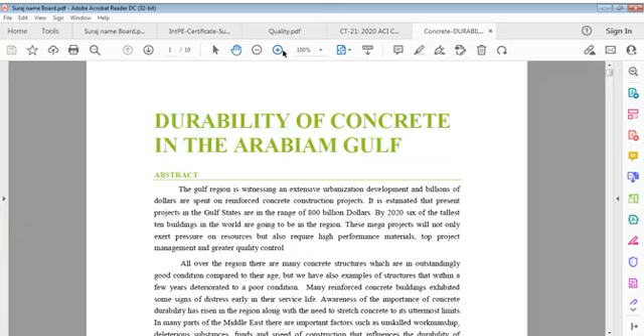It is concrete terminology. We have another file we will like to discuss, which we continued yesterday, and that is about the durability of concrete, which is just a file from some source. I cannot say that's the only file, but it is a reference file. There are so many files in the future also. I like to get these files through whatever way, myself writing, or getting reference from the internet, and it's really very important. So we have here these files. We can refer to this from time to time.

Now I start with my file that is meant for you, and that is the quality file. You can consider the name of the file is quality itself. I have written here, you can see on this screen, quality PDF. The title is in explanatory mode, a long title, and it is Active Quality Performing Application plus SHE, where S stands for safety, H stands for health, E stands for environment, plus engineering approach on designs, manufacturing as well as construction.

A kind of redefinition, though it's not in fact an original redefinition, but a referral. Meaning, what did we understand before, what do we understand now, and what should we understand in future for working considerations. It's not something new I am going to discuss with you, but I am going to share with you my views. Maybe my views are not good for you, you may know much better than what I know. That is interesting. If you know much better, I like to learn from you, through your comments, your criticism or your support, whatever it could be. Everybody has a chance.

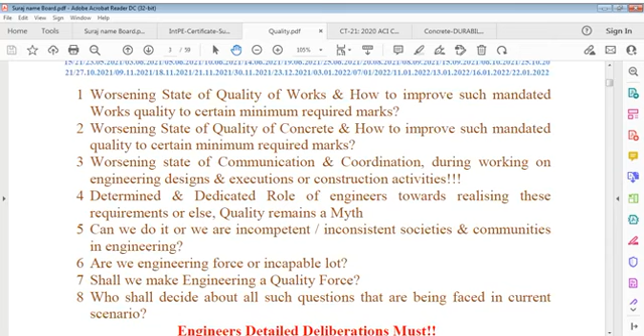And that's where the point lies in. That point is very important, we have to understand that fact. Certain red lines that must be turned green, and what to do about that? That is the point. You can see this file has been very old now, so many dates are indicated on its header, and that's all amendments made from one point to other point.

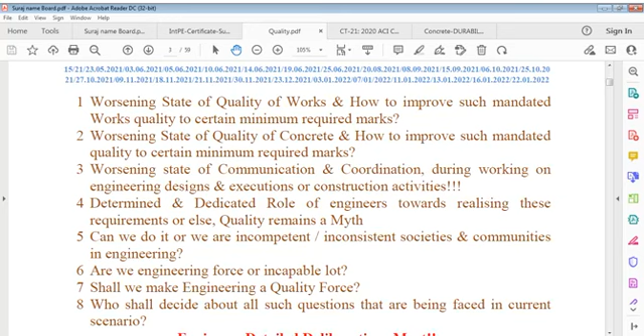Why say worsening state of quality of works? That is, you can say, the boosting title for this talk. Worsening state of quality of works, and how to improve such mandated works quality to certain minimum required marks.

I think the battery is fully charged and I can update on this. I put it off for some time, my battery to be put off for some time, and then less than half an hour after that I restart it. Okay, yes, please.

Alright, worsening state of quality of works. What to say about that? Worsening state of quality of works and how to improve such mandated work quality to certain minimum required marks.

That is first requirement, of course it is. Then you can say another one: worsening state of quality of concrete. First was the quality of works, and then the same question lies in and is repeated as worsening state of quality of concrete, and how to improve such mandated quality to certain minimum required marks.

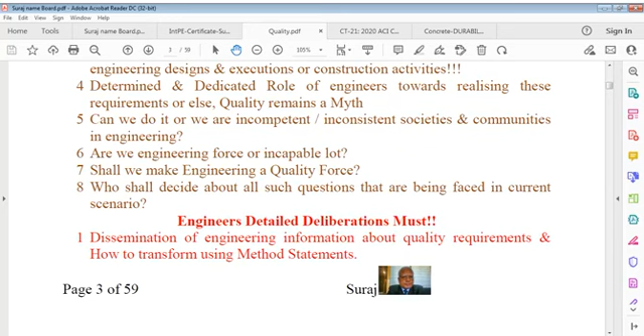The dissemination of engineering information about quality requirements and how to transform it using method statements. And the general description here is about requirements of the method statement. As I said in the first point here, methods. Then the question is methods, or rather I should say, the explanation is this way.

Explanation is the methods can be designed and drawn. Methods can be designed, or you can say action of line can be defined on methods. Or you can draw it in writing or in sketch way. It's called drawing of method statements or statement writing, or you can use your way, but I can call it

methods can be designed and drawn or stated for designs, for execution, for carrying out activities, as well as for rectifications, remedial, and for services. That is how methods can be designed, drawn, stated, for design work, for execution work, for carrying out activities, as well as for remedial actions or rectifications, for services.

There is one important point. The methods term used means comprehensive methods and not selective ones. We cannot simply take out something and say, given here, I am going to do this. You cannot have an excuse on this requirement because it is also a totality. Totality is required, not selective. We cannot select something and say this is right, therefore the previous one and next one shall be right. We cannot claim by selective action; this is chain activity.

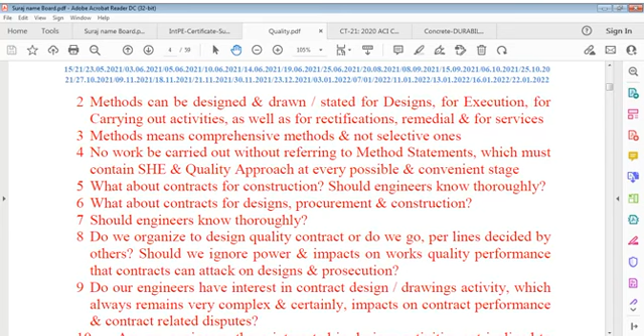Now we are going to jump on other points of view. I'd like to jump onto these terms later. Now we have to go to durability of concrete in the Arabian Gulf, though the spelling is wrong, don't worry. I have taken this file from the internet, so I could not correct it. Next time we'll look into this. If I write wrong, no problem.

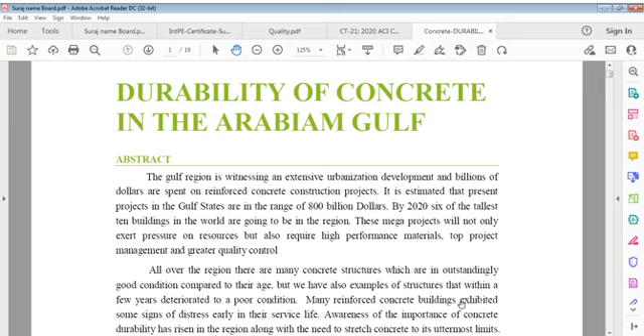That's not the point here. We discussed yesterday the abstract; it was just for introduction purposes, that it's for the Gulf. I discussed it at length. But just for information, I repeat this abstract so that you know what we are going to think of, and the remaining part we did last time, the long one. This is about the Gulf, that is GCC, the Gulf Cooperation Council, and it says the Gulf region is witnessing extensive urbanization. It's been long back and it's still happening now.

Development and billions of dollars are spent on reinforced concrete construction projects, RCC projects. It is estimated that present projects in Gulf states are in the range of $800 billion. This is just a reference, and 2020 has already gone. By 2020, 6 of the tallest 10 buildings in the world were to be part of this region. These projects not only exert pressure on resources but also require high performance material, top project management, and greater quality controls. These are all requirements.

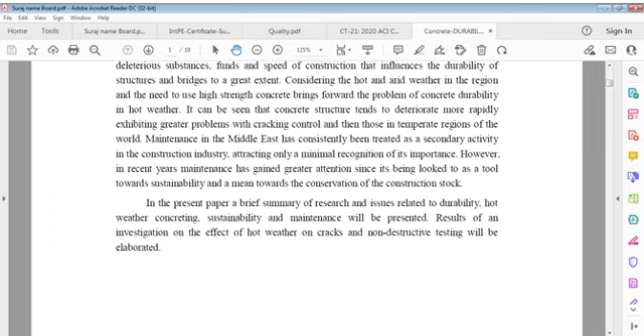Maintenance in the Middle East has consistently been treated as a secondary activity in the construction industry, attracting only minimum recognition of its importance. In recent years, maintenance has gained greater attention since it's being looked to as a tool towards sustainability and a means towards conservation of construction stock. Now it's a paper only. This paper gives a brief summary of research and issues related to durability, hot weather concreting, sustainability and maintenance, presents results of an investigation on the effect of hot weather on cracks, and elaborates on non-destructive testing.

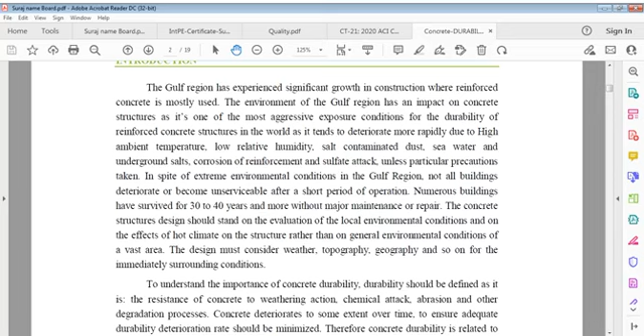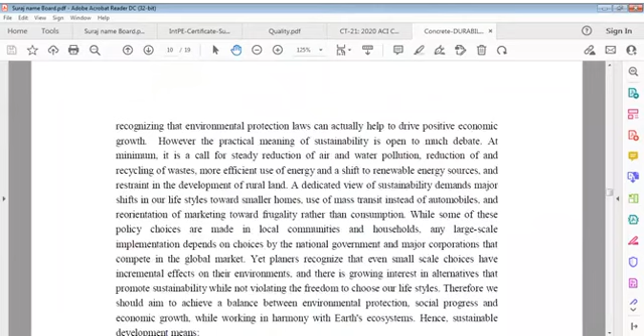We have gone through these pages. I will go back to some. Sulfate attack, carbonation, chloride corrosion we had done. Environmental cracks, I think in 29 there was something here. Let's start from here. The UAE is getting stricter on the environment friendly side to development, more so because of the rapid scale of development in so short a time, just 30 plus years.

Development has sometimes been at the cost of the environment, which is every country's, every region's natural heritage. Environment is not our build-up, just like air is not our build-up. Air, water, all these are not our build-up. We have to depend on nature to get more and more. That's what is important for discussion: development which sometimes has been at the cost of the environment, which is every country's, every region's natural heritage. That's what it says.

A fast growing population in that area, immense financial resources, and an ambitious development program have all combined to place strong pressure on the environment in this area, the UAE. The combination of all these factors is very important, that is, to enforce protection of the existing environment and to control how it can be done. That's an important point.

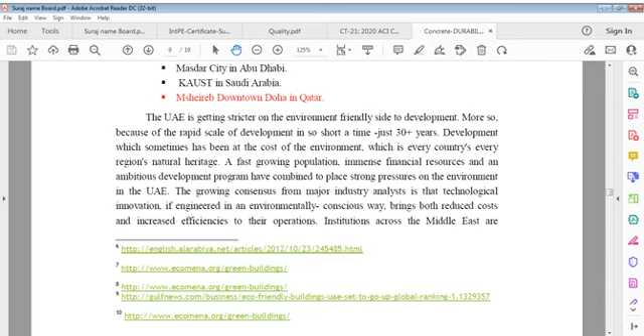The growing consensus from major industry analysts is that technological innovation, if engineered in an environmentally conscious way, brings both reduced cost and increased efficiencies into their operations. Institutions across the Middle East recognize that environmental protection laws can actually help drive positive economic growth. However, the practical meaning of sustainability is open to much debate.

At minimum, it is a call for steady reduction of air and water pollution. Important is steady reduction of air and water pollution, reduction of and recycling of wastes, more efficient use of energy, and a shift to renewable energy sources, restraint in development of rural land. So many reasons are here, which is a minimum one, and nothing very specific. And that's a call for study.

That is how to study the reduction of air and water pollution, how to reduce air pollution and how to reduce water pollution, and of course reduction of and recycling of waste, more efficient use of energy and shift to renewable energy sources, restraint in development of rural land, a dedicated view of sustainability,

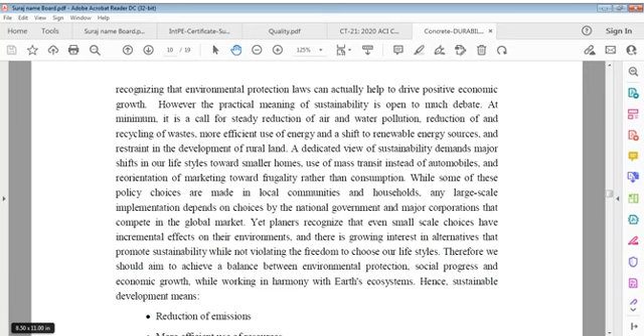So a dedicated view of sustainability demands major shift in our lifestyles towards smaller homes, use of mass transit instead of automobiles, and reorientation of marketing towards frugality, economical use of money, economical use of material, economical use of every requirement rather than consumption. While some of these policy choices are made in local communities and households, large-scale implementation depends on choices by policymakers or by national governments or state governments and major corporations that compete in global market.

Even then, planners recognize that even small-scale choices have incremental effects on their environments, and there is growing interest in alternatives that promote sustainability while not violating freedom to choose our lifestyle. Therefore, we should aim to achieve a balance between environmental protection, social progress, and economic growth. We have to have an objective to achieve a balance or state of equilibrium among environmental protection, social progress, and economic growth while working in harmony with Earth's ecosystem.

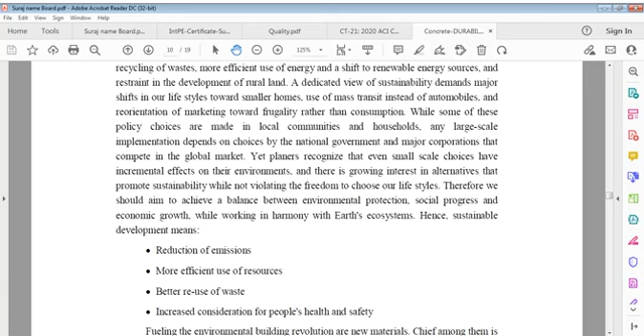Hence, sustainable development means reduction of emissions, more efficient use of resources, better reuse of waste, increased consideration for people's health and safety. These are very normal. Emissions control and resources best use, waste recycling, and of course health, safety, and I can add on top of all these quality issue.

Fueling the environmental building revolution are new materials. Environmental building, or we call buildings fit for natural use, not artificial orientation. And chief among them is glass, stronger, safer, and more energy efficient than ever. Low-emissive glass lets visible light in. You can take sunlight through glass. So low-emissive glass lets visible light in but keeps heat out.

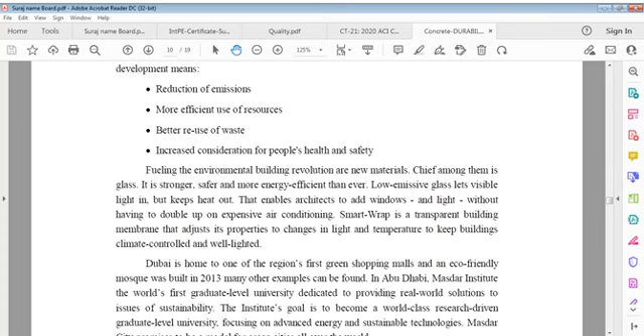That enables architects to add windows and light without having to double up on expensive air conditioning. Smart wrap is a transparent building membrane that adjusts its properties to changes in light and temperature to keep buildings climate controlled and well lighted.

This is a statement made by these people, and you can see yourself also what it says. Very simple. Fueling environmental building revolution means you have to propel environmental orientation for new buildings, and you have to use new materials, and a considerable part in that is glass, which is stronger, safer, more energy efficient than ever before.

And it should be low emissive glass, which lets visible light in, allows light to come into your covered area, and keeps heat out because of the tint on glass. It's not 100% allowing sunlight to go in, but light goes in without temperature. Temperature remains outside, probably around 70% of it remains outside. And this enables designers to add windows and light without having to double up on expensive air conditioning.

Percentage is how much in this thing? So I have to go back and see.

Well, no problem. So it enables our designers to add windows and lights without having to double up on expensive air conditioning. And Smart Wrap is a transparent building membrane that adjusts its properties to changes in light and temperature to keep buildings climate controlled, well lit. You can say well lit rather than lighted.

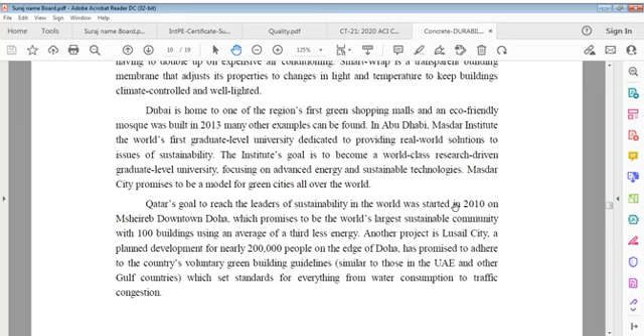If green building technologies were used in the Middle East instead of usual technologies, environmental problems will be tackled. Just a minute, please.

If green building technologies were used in the Middle East instead of usual technologies, environmental problems will be tackled significantly in addition to long-term financial returns. In terms of overall sustainability, the MENA region is still late compared to other markets, but in the next couple of years certain percentages of companies in this region have over 2 million square feet of green projects. All right, anyway, the construction durability issue is continuing.

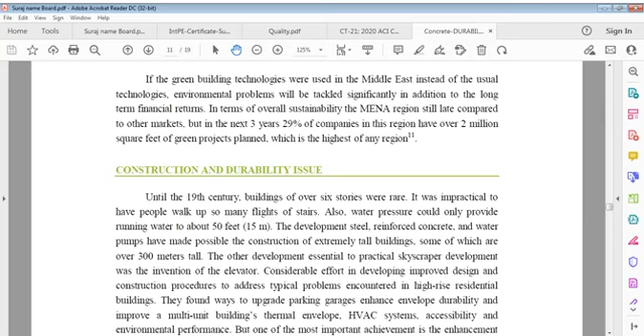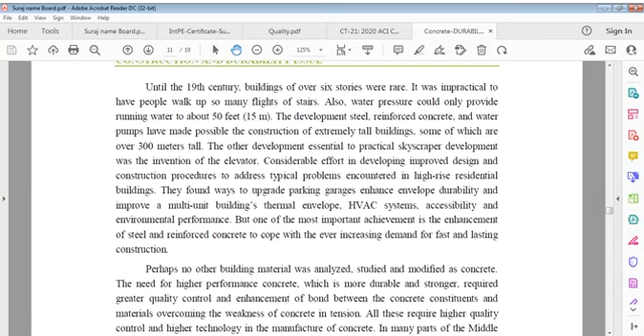Until the 19th century, buildings of over 6 stories were rare. It was impractical to have people walk up so many flights of stairs. Also, water pressure could only provide running water to about 15 meters. The development of steel, reinforced concrete, and water pumps has made possible the construction of extremely tall buildings, some of which are over 300 meters tall. Another development essential to practical skyscraper development was the invention of the elevator.

Considerable effort went into developing improved design and construction procedures to address typical problems encountered in high-rise residential buildings. They found ways to upgrade parking garages, enhance envelope durability and improve a multi-unit building's thermal envelope, heating, ventilation, air conditioning systems, accessibility and environmental performance. But one of the most important achievements is the enhancement of steel and reinforced concrete to cope with ever increasing demand for fast and lasting construction. So you can say development of buildings happened in this way.

Ways to upgrade parking garages, enhance envelope durability and improve multi-unit buildings' thermal envelope, heating, ventilation and air conditioning systems, accessibility and environmental performance. But the most important point is the enhancement of steel and reinforced concrete to cope with ever increasing demand for fast and lasting constructions. Perhaps no other building material was analyzed.

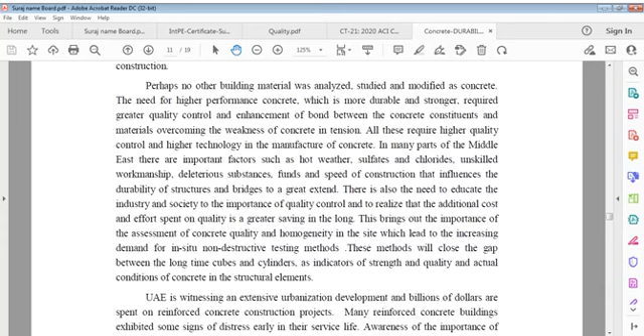This brings out the importance of assessment of concrete quality and homogeneity in site, which leads to increasing demand for in situ non-destructive testing methods. Such methods would close the gap between long time cubes and cylinders as indicators of strength and quality, and the actual conditions of concrete in structural elements.

The UAE, for example, witnesses an extensive urbanization development, and billions of dollars are spent on reinforced concrete construction projects. Many reinforced concrete buildings exhibited some signs of distress early in their service life. Awareness of the importance of concrete durability has risen in the region.

However, repair techniques are essentially those involving short-term control of the situation and the use of imported systems which are not fully tested.

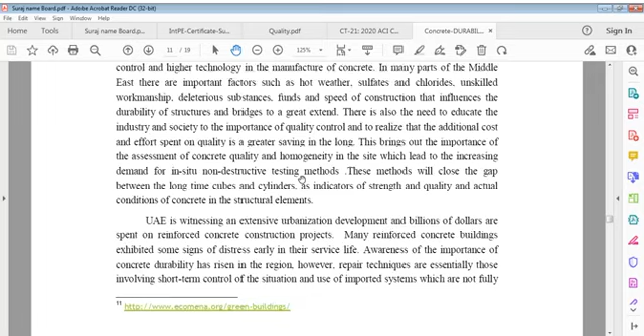What is meant by a durable structure is in practice very subjective and difficult to define precisely. It should refer to a structure maintaining a satisfactory performance over a determined period of time without requiring unexpected high costs for maintenance. Therefore, the term service life design has replaced the term durability.

Previously it was... service life design has replaced the term durability, being a quantifiable and measurable quantity. In principle, two basically different design strategies to ensure a required service life can be followed.

Avoid degradation threatening the structure due to the type of aggressivity of the environment. We have to avoid degradation threatening the structure because of an aggressive environment, and also select an optimal material composition and structural detailing to resist, for a specified period of use, degradation threatening the structure.

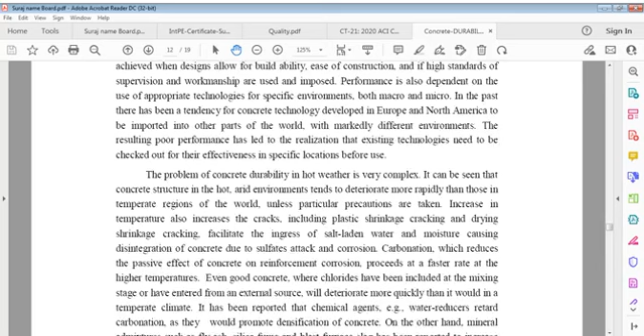Resulting poor performance has led to the realization that existing technologies require to be checked out for their effectiveness in specific locations before use. The problem of concrete durability in hot weather is very complex.

It can be seen that concrete structures in hot, arid environments tend to deteriorate more rapidly than those in temperate regions of the world, unless particular precautions are taken. Increase in temperature also increases cracks, including plastic shrinkage cracking and drying shrinkage cracking, which facilitate ingress of salt-laden water and moisture, causing disintegration of concrete due to sulfate attack and corrosion.

To repeat, it can be seen that concrete structures in hot, arid environments tend to deteriorate more rapidly than those in temperate regions of the world, unless particular precautions are resorted to. Increase in temperature, of course, increases cracks, including plastic shrinkage cracking and drying shrinkage cracking. Such cracks facilitate the ingress of salt-laden water and moisture, causing disintegration of concrete due to sulfate attack and corrosion.

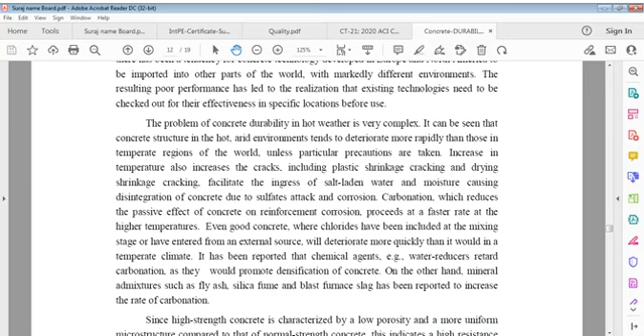Carbonation, which reduces the passive effect of concrete on reinforcement corrosion, proceeds at a faster rate at higher temperatures. Even good concrete, where chlorides have been included at the mixing stage or have entered from an external source, deteriorates more quickly than it would in a temperate climate.

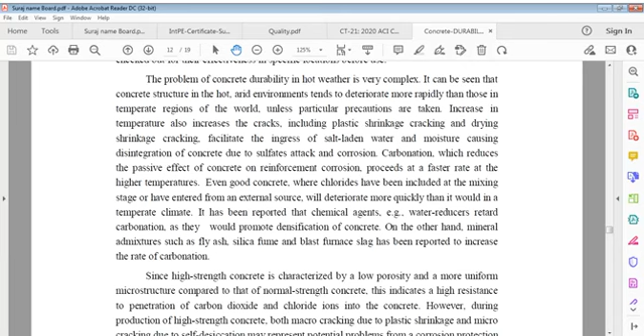It has been reported that chemical agents, namely water reducers, retard carbonation, as these promote densification of concrete. On the other hand, mineral admixtures such as fly ash, silica fume, and blast furnace slag have been reported to increase the rate of carbonation.

Since high strength concrete is characterized by low porosity and a more uniform microstructure compared to normal strength concrete, this indicates a high resistance to penetration of carbon dioxide and chloride ions into concrete.

However, during production of high strength concrete, both macro cracking due to plastic shrinkage and micro cracking due to self-desiccation may represent potential problems from a corrosion protection point of view.

Even for normal strength concrete, production of concrete with a good and stable air void system is normally a problem, but in the presence of high doses of superplasticizer, establishment of a good and stable air void system is an even bigger problem.

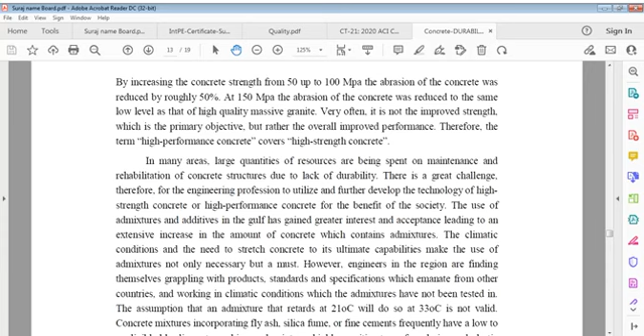In many areas, large quantities of resources are being spent on maintenance and rehabilitation of concrete structures due to lack of durability. There exists a great challenge, therefore, for the engineering profession to utilize and further develop the technology of high strength concrete or high performance concrete for the benefit of the profession and society.

Use of admixtures and additives in the Gulf have gained greater interest and acceptance, leading to an extensive increase in the amount of concrete which contains admixtures. Climatic conditions and the requirement to stretch concrete to its ultimate capabilities make use of admixtures not only necessary but a must.

However, engineers in the region are finding themselves grappling with products, standards and specifications which emanate from other countries and working in climate conditions which admixtures have not been tested in. The assumption that an admixture that retards at 21 degrees Celsius shall do so at 33 degrees Celsius is not valid.

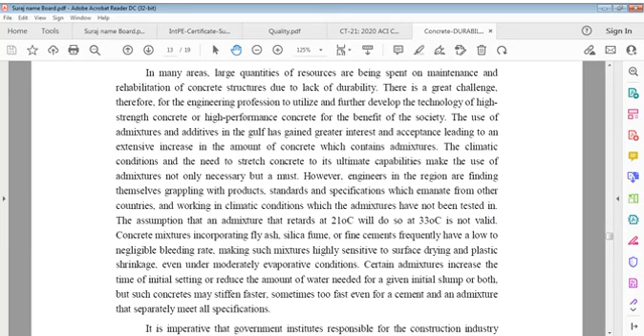Concrete mixtures incorporating fly ash, silica fume, or fine cements, or supplementary cementing materials (SCMs), frequently have a low to negligible bleeding rate, making such mixtures highly sensitive to surface drying and plastic shrinkage, even under moderately evaporative conditions.

Certain admixtures increase the time of initial setting or reduce the amount of water required for a given initial slump, or both. But such concretes may stiffen faster, sometimes too fast, even for a cement and an admixture that separately meet all specifications.

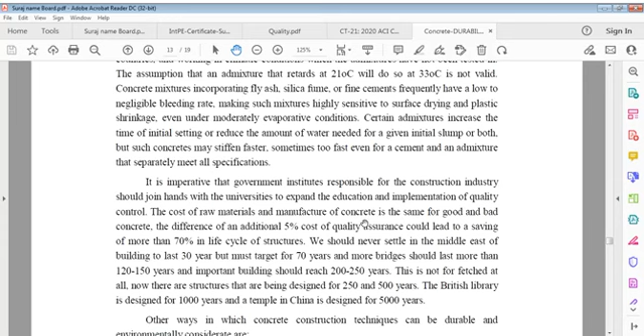It's imperative that government institutes responsible for the construction industry should join hands with universities to expand education and implementation of quality control. The cost of raw materials and manufacture of concrete is the same for good and bad concrete.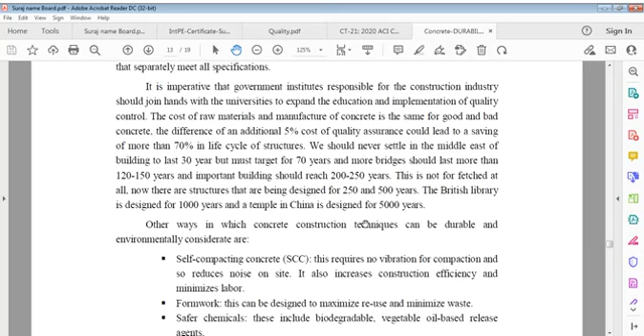The cost of raw materials and manufacture of concrete, of course, is the same for good and bad concrete. A difference of an additional 5% cost for quality assurance could lead to a saving of more than 70% in the life cycle of structures.

We should never settle in the Middle East for buildings with a 30-year lifespan.

We should never settle for a middle life of 30 years, but must target 70 years or more. Bridges should last more than 120 to 150 years. An important building should reach 200 to 250 years. That is the point, and it's not far-fetched at all. There are structures being designed for 250 and 500 years. The British Library is designed for 1000 years, and a temple in China is designed for 5000 years.

I repeat, this is a very important paragraph, though it may be referred to. It's not original writing. Of course it is a reference, but it should be very clear and known.

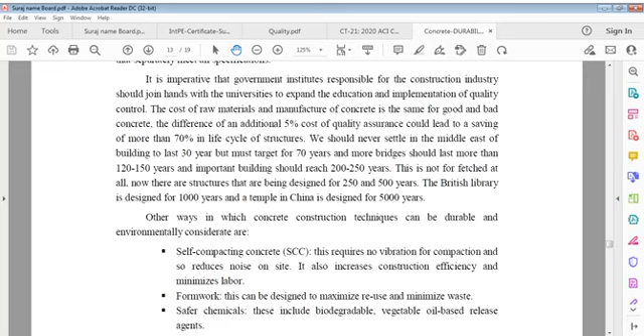Now there are ways in which concrete construction techniques can be made durable and environmentally considerate. Here is self-compacting concrete, which requires no vibration for compaction and so reduces noise on site, increases construction efficiency, and minimizes workforce. Formwork can be designed to maximize reuse and minimize waste. Chemicals include biodegradable vegetable oil-based release agents, and of course admixtures. For example, many admixtures used in the United Kingdom to improve performance are derived from natural products such as lignin, a byproduct of the paper industry.

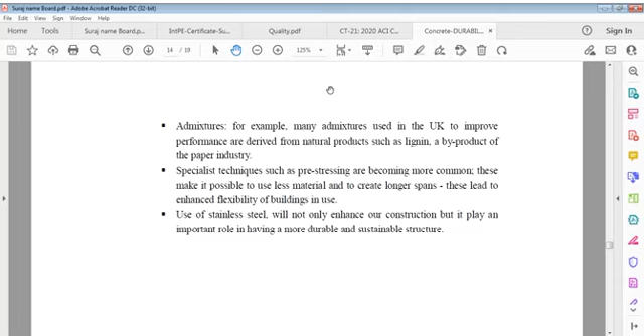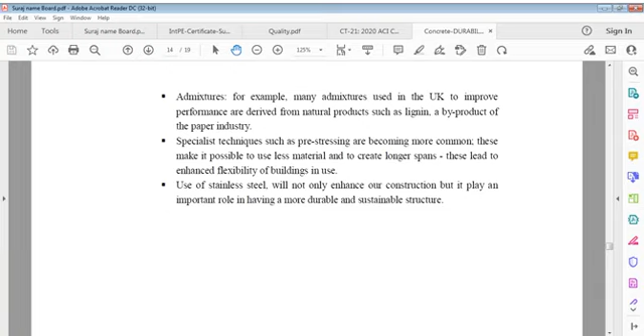Specialist techniques such as pre-stressing are becoming more common every day. We find that these make it possible to use less material and create longer spans. These lead to enhanced flexibility of buildings in use. Use of stainless steel not only enhances our construction, but plays an important role in creating more durable and sustainable structures.

Here is now a case study we are referring to, and this is of course a reference; I have no contribution to this. It says: effect of hot weather concreting on the cracking tendency of tensile specimens. This is part of a discussion on the durability of concrete in the Arabian Gulf. This case study concerns hot weather.

Hot weather introduces many problems in producing, transporting, casting and curing concrete, and these can adversely affect the properties of fresh and hardened concrete. Hot weather decreases the workability of fresh concrete mix. It accelerates the rate of stiffening, that is slump loss, and reduces setting time. Moreover, it aggravates cracking due to plastic shrinkage and drying shrinkage.

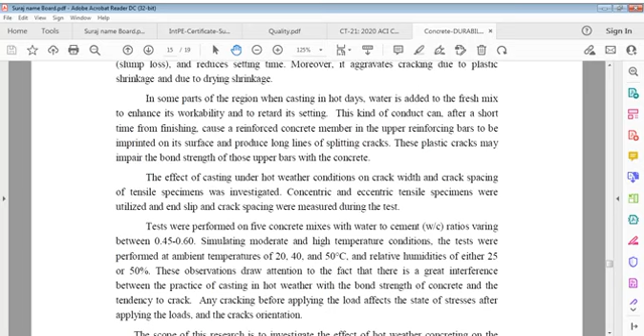This kind of conduct can, a short time after finishing, cause the upper reinforcing bars of a reinforced concrete member to be imprinted on its surface and produce long lines of splitting cracks. These plastic cracks may impair the bond strength of these upper bars with concrete. It's a good example of the practical aspect.

What it says is, in some parts of the region, when casting in hot weather conditions, water is added for convenience, which is wrong actually. Water is added to the fresh mix to enhance its workability and to retard its setting. This kind of conduct can, a short time after finishing, cause the upper reinforcing bars to be imprinted on its surface.

You can see some steel imprints on the surface of concrete, and this produces long lines of splitting cracks, which may impair the bond strength of those upper steel bars with concrete. The effect of casting under hot weather conditions on crack width and crack spacing of tensile specimens was investigated. Concentric and eccentric tensile specimens were utilized, and end slip and crack spacing were measured during tests.

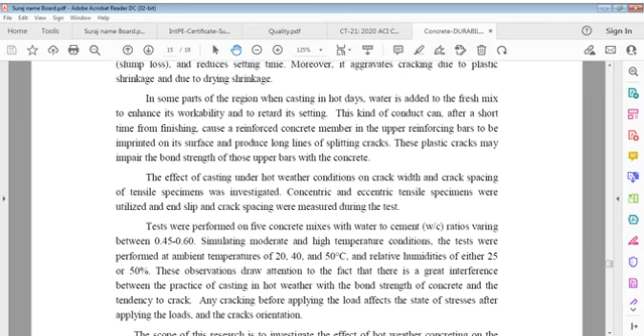Tests were performed on 5 concrete mixes with water cement ratio varying between 0.45 and 0.6, simulating moderate and high temperature conditions. Tests were performed at ambient temperatures of 20, 40 and 50 degrees Celsius, and relative humidities of either 25 or 50%. These observations draw attention to the fact that there is a great interference between the practice of casting in hot weather with bond strength of concrete and tendency to crack.

So I was saying the conditions were that water cement ratio was between 0.45 and 0.6, ambient temperatures 20, 40 and 50 degrees Celsius, and relative humidity 25 or 50%. These observations draw attention to the fact that there's a great interference between the practice of casting in hot weather with bond strength of concrete and tendency to crack. Cracking before applying load affects the state of stress after applying loads and crack orientation.

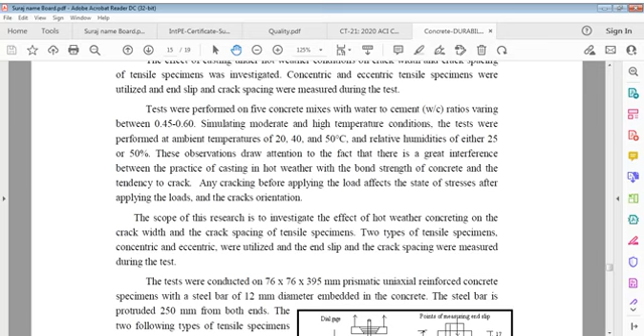The scope of this research work is to investigate the effect of hot weather concreting on crack width and crack spacing of tensile specimens. 2 types of tensile specimen, concentric and eccentric, were utilized and end slip and crack spacing were measured.

So here it is. Tests were conducted on 76 by 76 by 395 mm prisms that you can see in this sketch. This is the 395 height, and here is the 76 by 76 square. Here is the 12 mm dia steel bar, and the points of measuring end slip, this one and this other one, 17 mm from the ends, then 15 mm and 15 mm, and the bar is 12 itself.

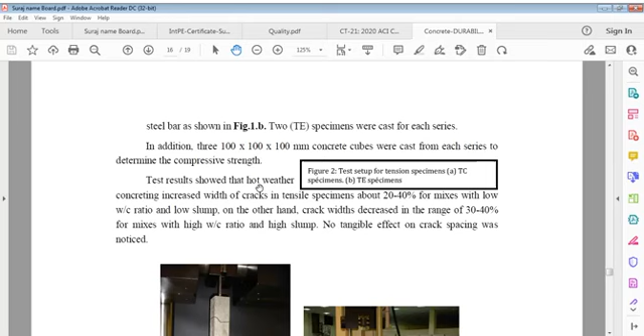Now eccentric tensile specimens TE, each reinforced with an eccentric steel bar, are shown in figure 1B. Two TE specimens were cast for each series. Now, in addition, three 100 by 100 by 100 mm concrete cubes were cast from each series to determine compressive strength.

Test results showed that hot weather concreting increased the width of cracks in tensile specimens by about 20 to 40% for mixes with low water cement ratio and low slump. On the other hand, crack widths decreased in the range of 30 to 40% for mixes with high water cement ratio and high slump. No tangible effect on crack spacing was noticed.

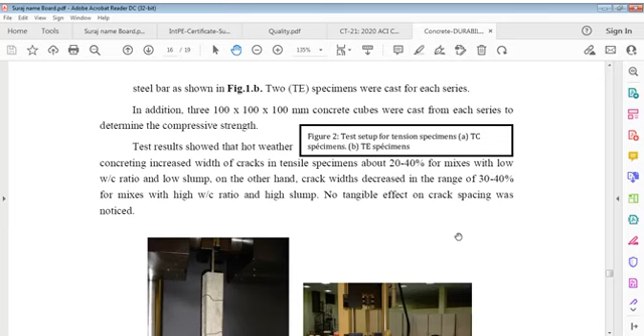Test results showed that hot weather concreting increased the width of cracks in tensile specimens by about 20 to 40% for mixes with low water cement ratio and low slump. On the other hand, crack widths decreased in the range of 30 to 40% for mixes with high water cement ratio and high slump. No tangible effect on crack spacing was noticed. Only the width of cracks is affected. Low slump and low water cement ratio increased width of cracks, while high slump and high water cement ratio reduced width of cracks.

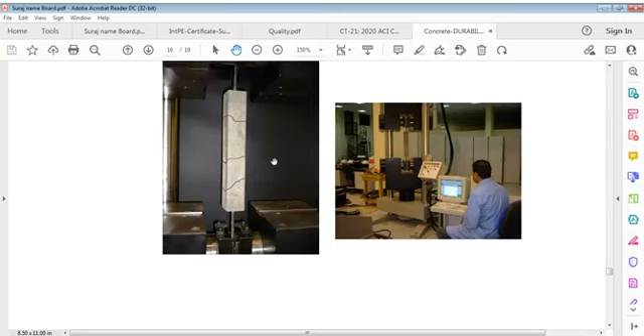You can see this here. It's shown as prismatic. So these were seen, and if you go further we'll see what it says now: non-destructive testing for concrete compressive strength. Non-destructive testing for compressive strength.

Non-destructive testing is a useful and practical approach to determine in situ compressive strength of concrete. It's used as a measure for quality as well as to determine uniformity of materials in existing structures. In practical applications, non-destructive testing can be utilized to calculate relative compressive strength and to provide guidelines for continuing construction in an effective and safe manner.

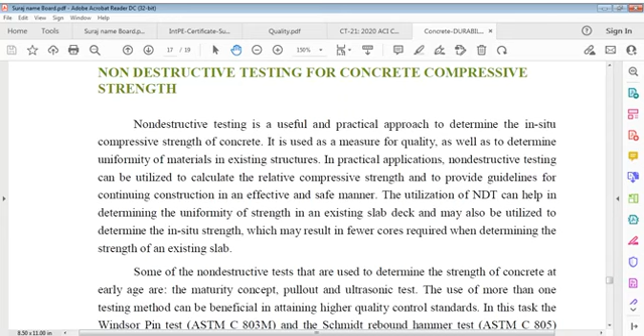Utilization of NDT, non-destructive testing, can help in determining uniformity of strength in an existing slab or deck, and may also be utilized to determine in situ strength, which may result in fewer cores required when determining strength of an existing slab. It's a very important knowledge area. If you know, fine, but for those who do not know, I repeat.

NDT means non-destructive testing, a useful and practical approach to determine in situ compressive strength of concrete. And it's used to measure quality as well as to determine uniformity of materials, not heterogeneity, uniformity of material in existing structures. In practical applications, non-destructive testing can be utilized to calculate relative compressive strength, relative not original, and to provide guidelines for continuing construction in an effective and safe manner.

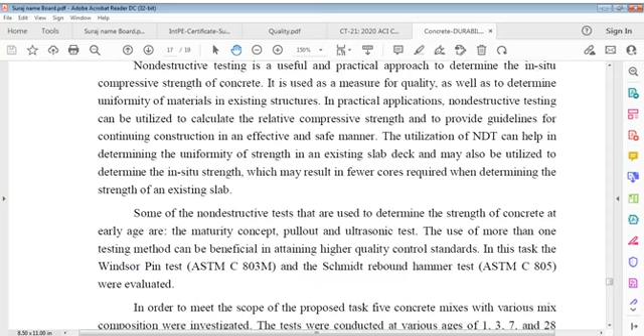NDT can help in determining uniformity of strength in an existing slab or deck, and may also be utilized to determine in situ strength, which may result in fewer cores required when determining strength of an existing slab. So cube and core testing, of course, can help to know. You have to know about strength of concrete, relative strength of concrete.

Some non-destructive tests that are used to determine strength of concrete at early age are the maturity concept, pull-out, and ultrasonic test. Use of more than one testing method can be beneficial in attaining higher quality control standards. In this task, the Windsor pin test, ASTM C803M, and the Schmidt rebound hammer test, ASTM C805, were evaluated.

In order to meet the scope of the proposed task, 5 concrete mixes with various mix compositions were investigated. Tests were conducted at ages of 1, 3, 7 and 28 days. 7 and 28 are common, but 1 and 3 were added. Mixes were designed to have strength variation between 10 to 80 MPa. 100 mm cubes and 150 by 300 mm cylinders were utilized.

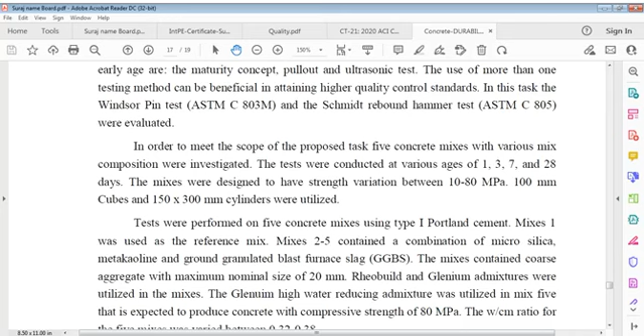Tests were performed on 5 concrete mixes using type 1 Portland cement, normal cement. Mix 1 was used as reference. Mixes 2 to 5 contained a combination of microsilica, metakaolin and ground granulated blast furnace slag, GGBS. Mixes contained coarse aggregate with maximum nominal size of 20 mm.

Rheobuild and Glenium admixtures were utilized in the mixes. These are admixtures, Rheobuild and Glenium. Glenium high range water reducing admixture was utilized in mix 5, which is expected to produce concrete with compressive strength of 80 MPa. Water cementitious material ratio for the 5 mixes was varied between 0.32 to 0.38.

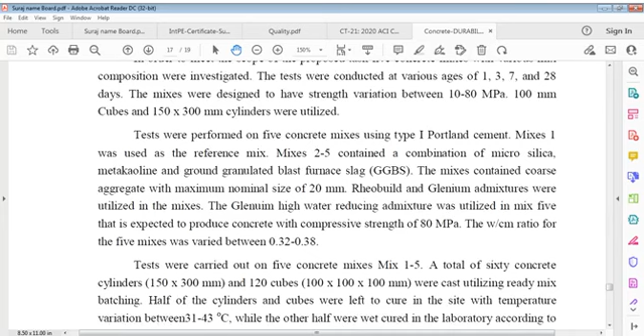Tests were carried out on 5 concrete mixes, Mix 1 to 5. A total of 60 concrete cylinders, 150 by 300 mm, and 120 cubes, 100 by 100 by 100 mm, were cast utilizing ready mix batching.

50% of cylinders and cubes were left to cure on site with temperature variation between 31 to 43 degrees Celsius, while the other half were wet cured in the laboratory according to ASTM C39 specifications. A total of 5 concrete retaining walls were also constructed on site. Non-destructive tests were performed on concrete walls as well as cylinders and cubes.

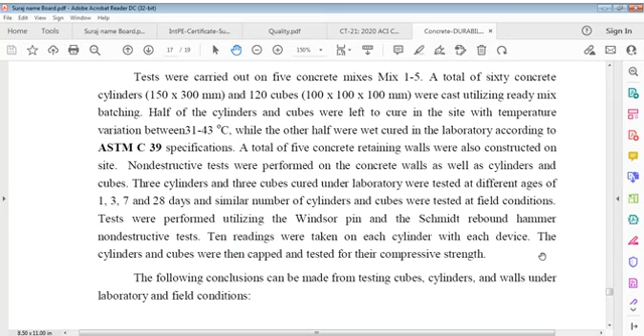The following conclusions can be made from testing cubes, cylinders and walls under laboratory and field conditions. Compressive strength at first day of cubes and cylinders cured at site condition is higher than specimens cured at lab conditions. Opposite trend was obtained at 28 days.

Overall ratio between cube and cylinder strength for laboratory and field conditions averaged 1.16. Linear and exponential relationships between compressive strength and pin penetration as well as compressive strength and rebound number were established under laboratory and field curing conditions.

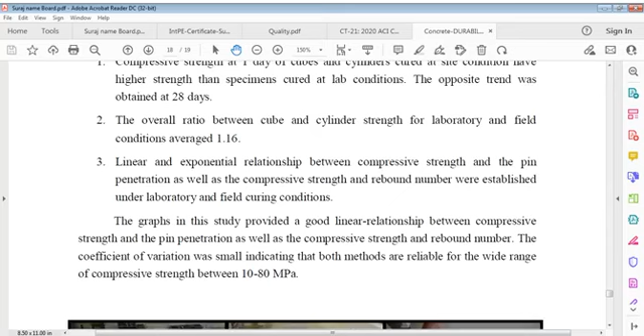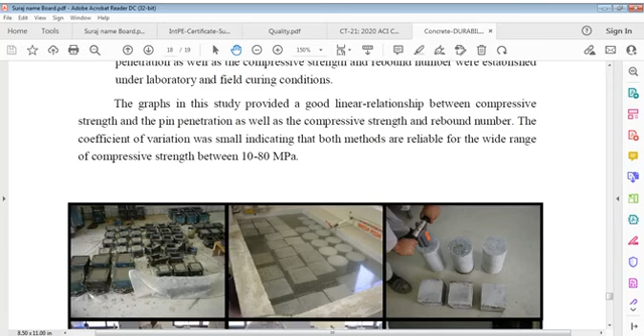It says first day testing of cubes and cylinders that are kept on site is higher than those in the laboratory, and it's opposite at 28 days. And there's a ratio about cube and cylinder strength. Overall ratio between cube and cylinder strength for laboratory and field condition is 1.16, which means cube is 16% more than cylinder.

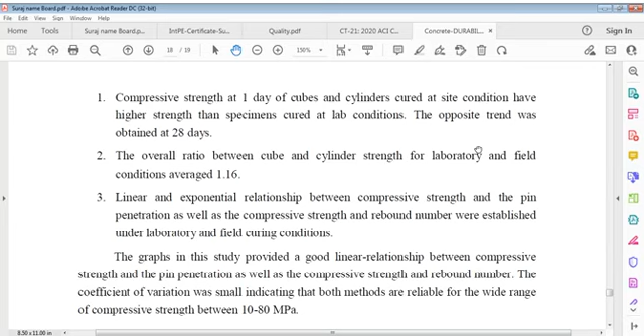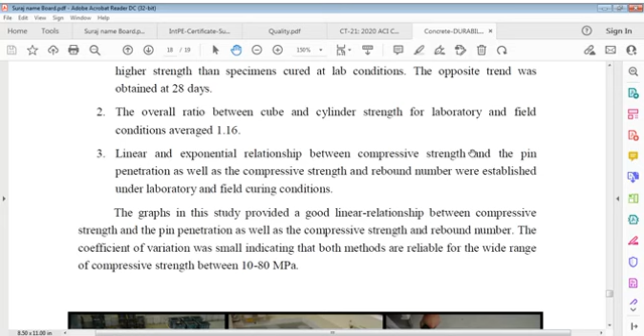Linear and exponential relationships between compressive strength and pin penetration as well as compressive strength and rebound number were established under laboratory and field curing conditions. Graphs provided a good linear relationship. Coefficient of variation was small, indicating both methods are reliable for a wide range of compressive strength varying between 10 and 80 MPa.

So what was this? It's important what it did actually. It says tests were carried out on 5 concrete mixes, 1 to 5. Total of 60 concrete cylinders, 150 by 300 mm, means 150 diameter, 300 mm height, and 120 cubes, 100 by 100 by 100, cast utilizing ready mix. Half cylinders and cubes were left to cure on site with temperature variation between 31 to 43 degrees Celsius, while the other half were wet cured to laboratory specifications.

Total 5 concrete retaining walls were also constructed on site. Non-destructive tests were performed on concrete walls as well as cylinders and cubes. 3 cylinders and 3 cubes cured under laboratory were tested at ages of 1, 3, 7 and 28 days, and a similar number were tested at field conditions. Tests were performed utilizing Windsor pin and Schmidt hammer non-destructive tests, and readings were taken, etc.

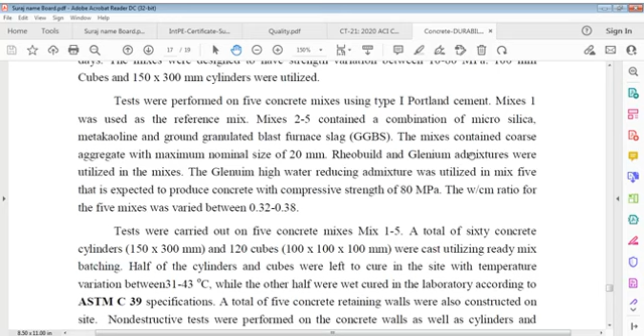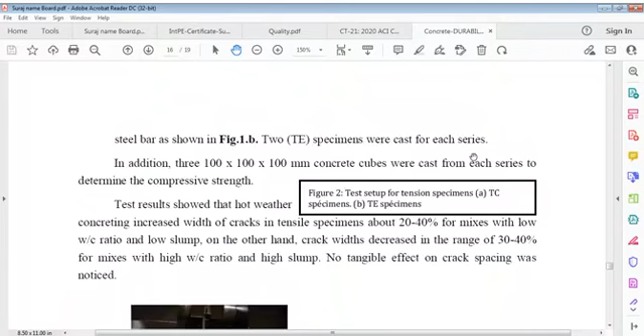Here also, just for information, I have brought this paper for discussion because we have to understand a lot in this, and without understanding we cannot grasp anything.

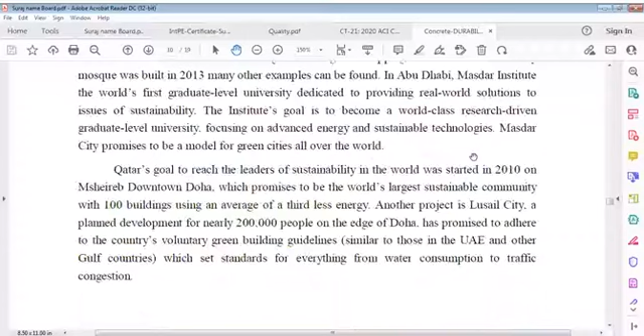I think the purpose of this paper has been over, and again I would say what is important is sustainability. That is a very important issue here: sustainability of concrete, how to hold it, how to use it. It says reduction of emissions. How can we develop sustainability? That is the only way: reduction of emissions, more efficient use of resources, reuse of waste, and increased consideration for people's safety and health.

And of course we can cover all these within the quality issue. Quality issue is not limited, it is expanded; it's applicable to every act, on properties, on performance, and whatever we can say. Environment issues are these, as we said: emission, best or more efficient use of resources, reuse of waste, and safety and health. These are environment related, and we have many others likewise.

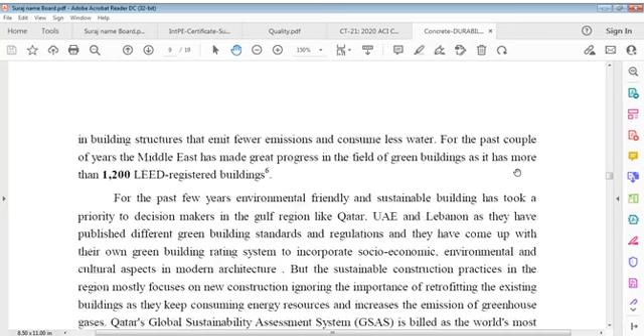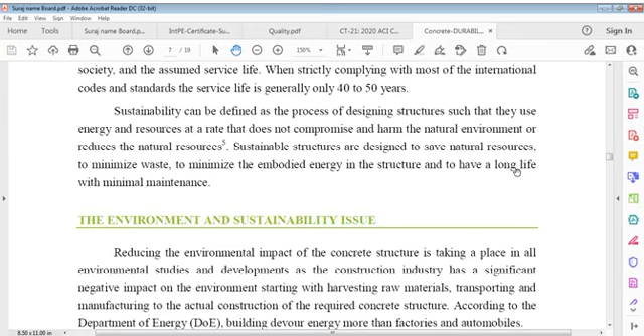And of course, the durability definition. Durability is defined as a kind of property in concrete, or you can say resistance of concrete. To what? Whether concrete can resist weathering conditions, chemical attacks, and other degradation processes. It's also defined as design of structures to meet design life requirements.

And design life of a project is defined as the period of time during which a structure is required to perform safely after the date of practical completion, with an acceptable probability that it operates within its specified design parameters without replacement, refurbishment or major maintenance during that time. When performance of the structure and its appearance are acceptable as long as users require the structure, the structure is considered durable.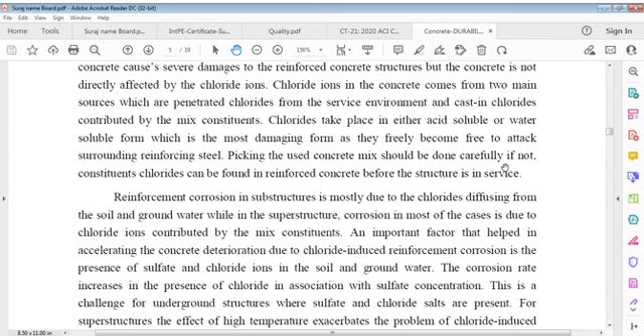So we can say how concrete performs is more important than something else. And there is also chloride corrosion. It's also a very important part. Chloride corrosion, rapid chloride penetration, how many coulombs actually enter. That's what we talk about many times.

And of course in the Arabian Gulf, it's the major form of deterioration of concrete. Concrete deteriorates because of chloride-induced reinforcement corrosion. Corrosion and expansion of rebar embedded in concrete causes severe damage to reinforced concrete structures. Concrete is not directly affected by chloride ions. Chloride ions in concrete come from two main sources: penetrated chlorides from the service environment and cast-in chlorides contributed by mix constituents.

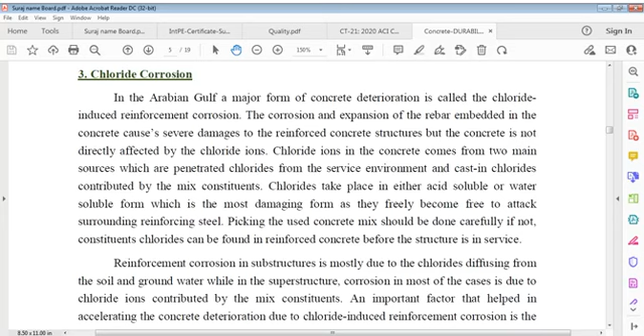Chlorides occur as either acid soluble or water soluble, the most damaging form as they become free to attack surrounding reinforcing steel. Picking the concrete mix constituents should be done carefully, since chlorides can be found in reinforced concrete before the structure goes into service. Reinforcement corrosion in substructures, say foundations, is mostly due to chloride diffusion from soil and groundwater.

Chloride diffusion from soil and groundwater, while in superstructure, corrosion in most cases is affected due to chloride ions contributed by mix constituents as well as from weather or gases. An important factor that helps in accelerating concrete deterioration due to chloride-induced reinforcement corrosion is the presence of sulfate and chloride ions in soil and groundwater.

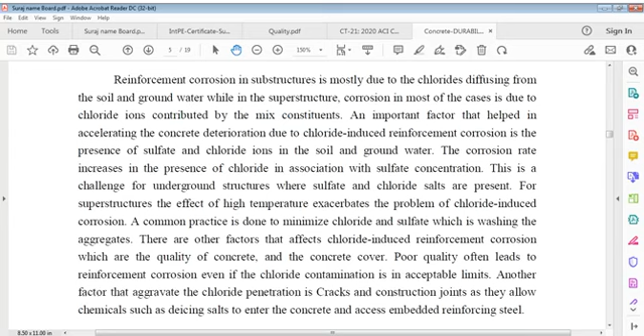Corrosion rate increases in presence of chloride in association with sulfate concentration, which is a challenge for underground structures where sulfate and chloride salts are present. And for superstructure, the effect of high temperature exacerbates the problem of chloride-induced corrosion. A common practice to minimize chlorides and sulfates is washing

aggregates. Other factors that affect chloride-induced reinforcement corrosion are quality of concrete and concrete cover. Poor quality often leads to reinforcement corrosion, even if chloride contamination is within acceptable limits. Another factor that aggravates chloride penetration is cracks and construction joints, as they allow chemicals such as de-icing salts to enter concrete and access embedded reinforcing steel.

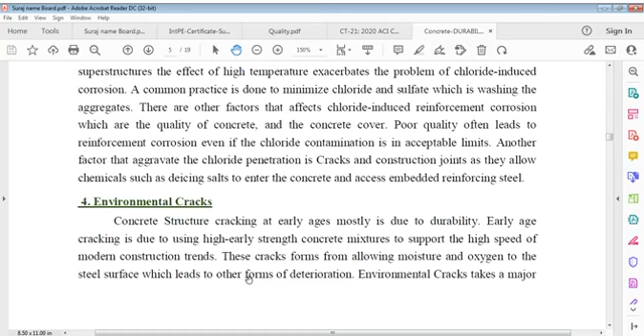Environmental cracks: concrete structures crack at early stages, mostly affecting durability. Early age cracking is due to using high early strength concrete mixes to support the high speed of modern construction trends. These cracks allow moisture and oxygen to reach the steel surface. What else can we extract from this for revision?

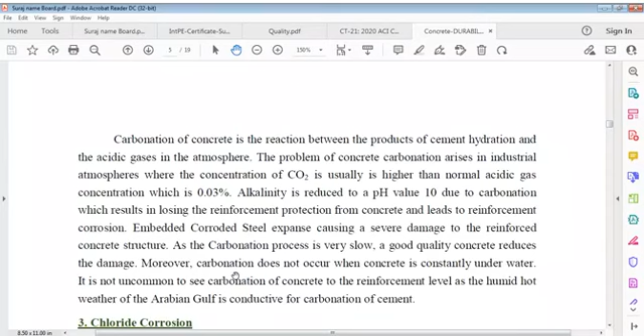And here is carbonation of concrete. Carbonation of concrete is a reaction between products of cement hydration and acidic gases in the atmosphere. The problem of concrete carbonation arises in industrial atmospheres, where the concentration of carbon dioxide is usually higher than the normal concentration, which is only 0.03%.

Alkalinity is reduced to a pH value of 10 due to carbonation, which results in losing reinforcement protection from concrete and leads to reinforcement corrosion. Embedded corroded steel expands, causing severe damage to the reinforced concrete structure.

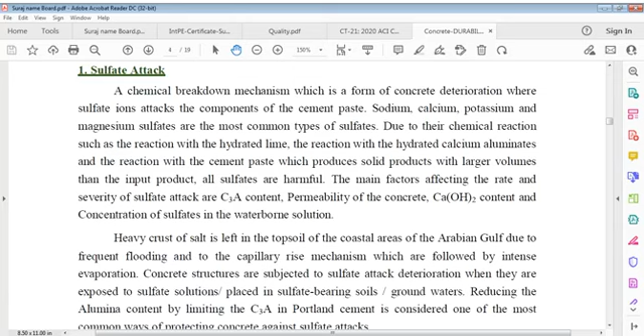All sulfates are harmful. Main factors affecting rate and severity of sulfate attack are C3A content and permeability of concrete, Ca(OH)2 content and concentration of sulfates in waterborne solutions.

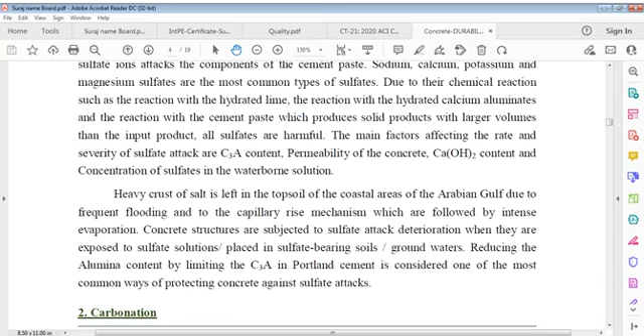A heavy crust of salt is left in the topsoil of coastal areas of the Gulf, called sabkha areas, due to frequent flooding and the capillary rise mechanism, which are followed by intense evaporation.

With this capillary rise mechanism followed by intense evaporation, concrete structures are subject to sulfate attack deterioration when exposed to sulfate solutions, placed in sulfate bearing soils or groundwaters. Reducing alumina content by limiting C3A in Portland cement is considered one of the most common ways of protecting concrete against

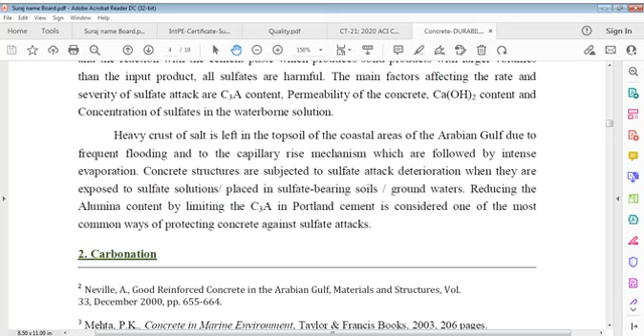Come back. Let me see. I think it's not taking care. Let us see how it works. If it works fine, we'll continue. If it doesn't work, okay, fine. I'll go for 5 minutes and come back. Otherwise, it's a problem for me. If you can wait, fine. It's going to be long hours. Let me come back in 5 minutes to see. There's no rain now. I'll also put off my battery now.

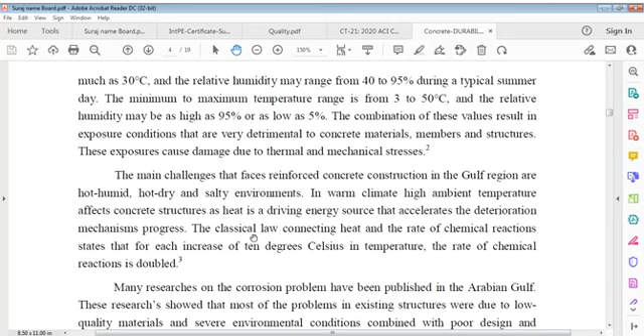Many researches on corrosion problem have been published in Arabian Gulf. These researches show that most problems in existing structures were due to low quality materials and severe environmental conditions combined with poor design and construction practices, and due to poor mix design and lack of quality control in field. Moreover, for concrete durability in Gulf, weather is worst in world. For that reason, it is challenging to see structures survive their intended service life.

It's a very important paragraph, I repeat: many researches on corrosion problem have been published in Arabian Gulf. Researches show that most problems in existing structures have been due to low quality materials and severe environmental conditions combined with poor design and construction practices, and due to poor mix design and a lack of quality control in field.

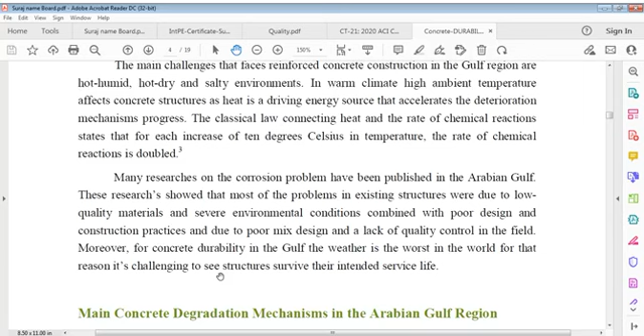Conventional water resources of Arabian Gulf region include surface water, groundwater, and shallow and deep aquifers. Non-conventional water resources come from desalination and wastewater recycling, while water resources are in short supply. Demand for water is growing in GCC countries. Given the situation, the question of optimal management or organization of water resources is clearly of crucial importance, with implications not only for future development of these countries but also for sustainability of their past economic and social achievements. This dilemma arises from continuing growth in demand, which is a result of population increase and other social factors, in conjunction with the fact that region is already exploiting all available resources.

Causes of increasing water demand include population growth and rapid urbanization, besides wasteful consumption patterns both in domestic and agricultural sectors. All countries in the region have a high level of urbanization, more than 84% in most cases. Water consumption in these countries ranges between 300 to 750 liters per person per day, which ranks among highest in world.

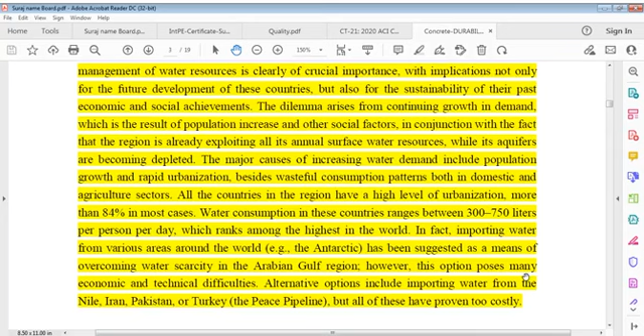In fact, there are proposals for importing water from various sources into Arabian Gulf regions. However, this option poses many economic and technical difficulties. Alternative options include importing water from Nile, Iran, Pakistan, Turkey, but all of these have problems.